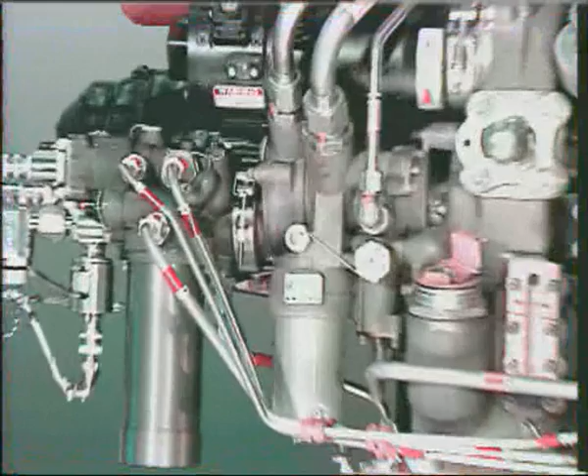The oil pump unit assembly is installed at the 9 o'clock position on the front of the accessory gearbox. The oil supply pump pressurizes the oil from the gearbox oil sump. The oil pressure is regulated by the oil pressure regulating valve. The high pressure oil system is protected by the oil pressure relief valve.

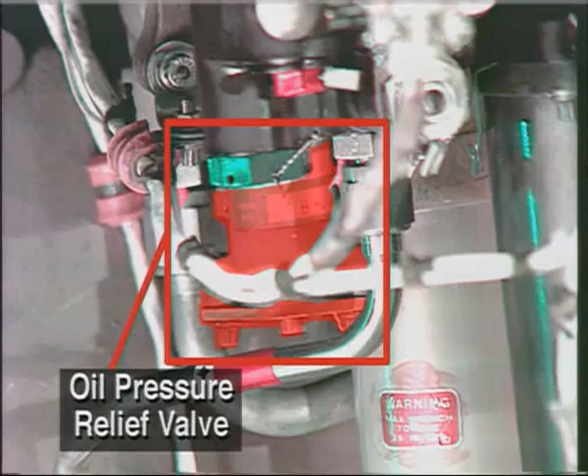The pressurized oil from the supply pump is routed to the thermal bypass valve, which is installed on the oil cooler. If the oil is cold, the thermal bypass valve is open, and the oil flows directly to the oil supply filter. When the oil is hot, the thermal bypass valve is closed, and the oil flows through the oil cooler to the oil supply filter.

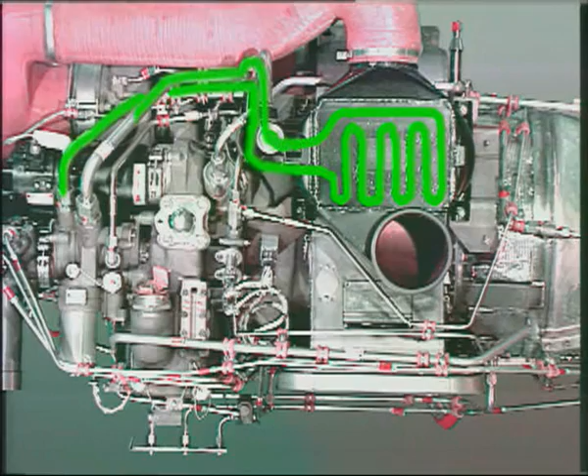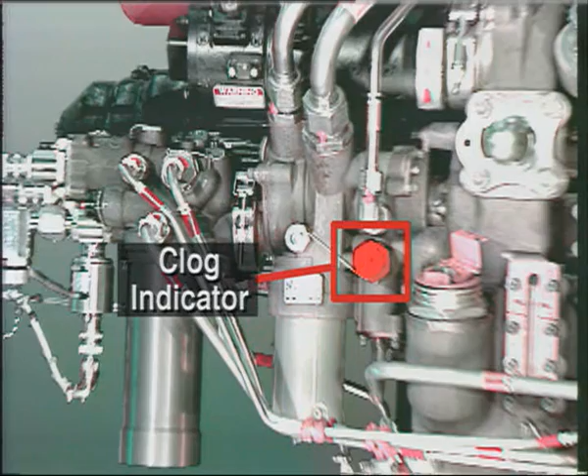The oil supply filter is mounted on the oil pump housing. The oil filter is equipped with a clog indicator for condition monitoring and a filter bypass valve to protect the system.

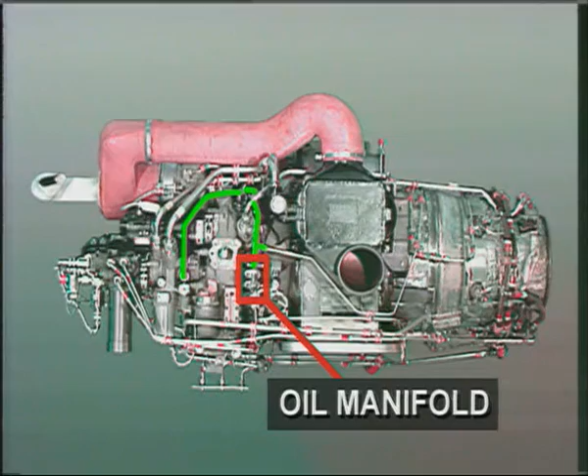The oil filter outlet line supplies an oil manifold installed on a bracket at the 9 o'clock position on the air inlet plenum. The oil manifold supplies the turbine support bearing. It is equipped with an oil pressure switch and an oil temperature sensor.

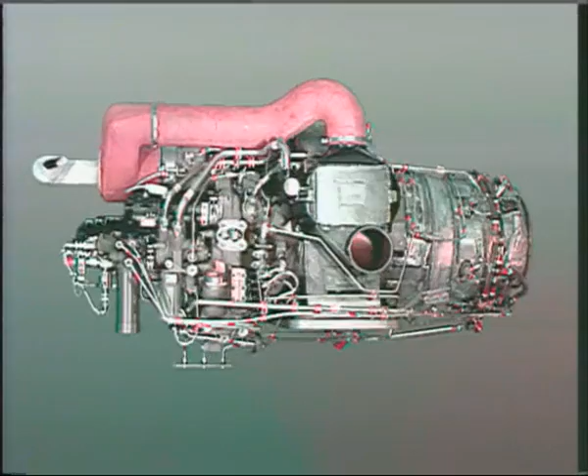The lubricating oil is returned to the gearbox reservoir to complete the cycle. The turbine support bearing oil is returned through a line from the 7 o'clock position on the turbine case. The oil from the starter clutch, the front support bearing, and the gearbox lubricating oil is returned internally by gravity.

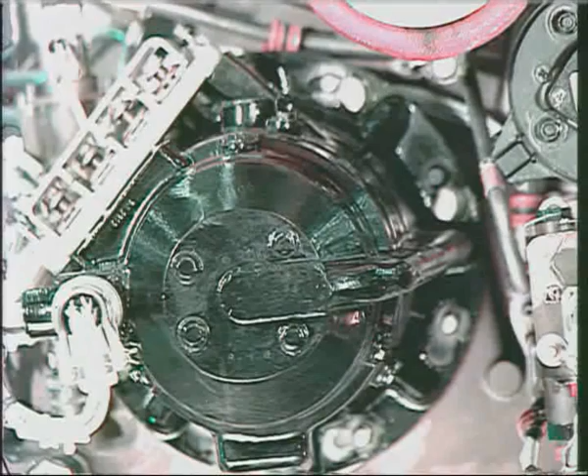The oil from the APU generator is returned through the generator oil filter by the generator oil scavenge pump. The oil scavenge pump is installed in the generator mounting flange cavity. The generator must be removed to gain access to the scavenge pump.

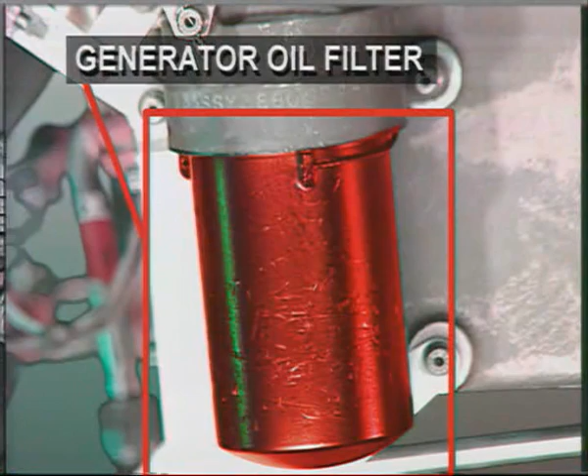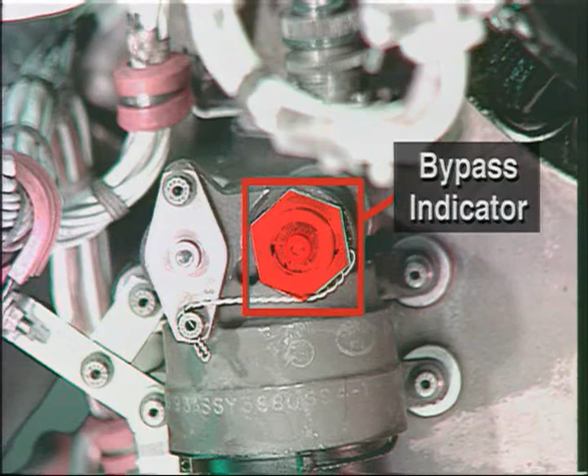The generator oil filter is located at the 3 o'clock position on the front of the accessory gearbox. The filter housing is equipped with a filter bypass indicator for condition monitoring and a differential pressure bypass valve to protect the oil system.

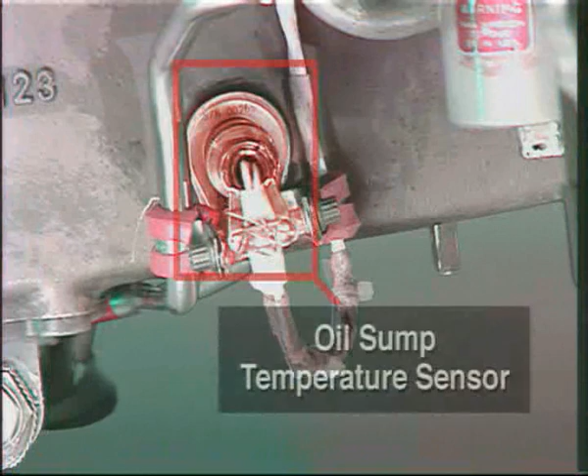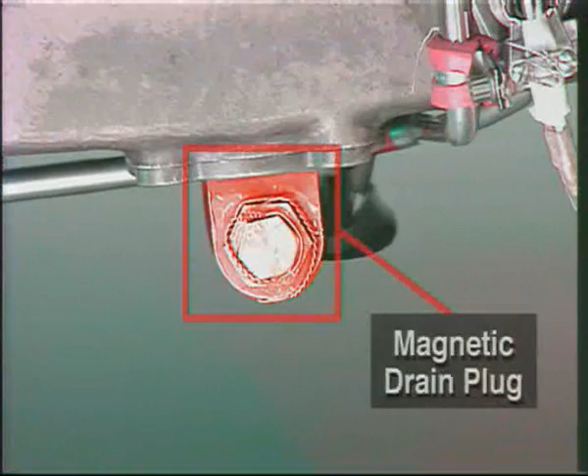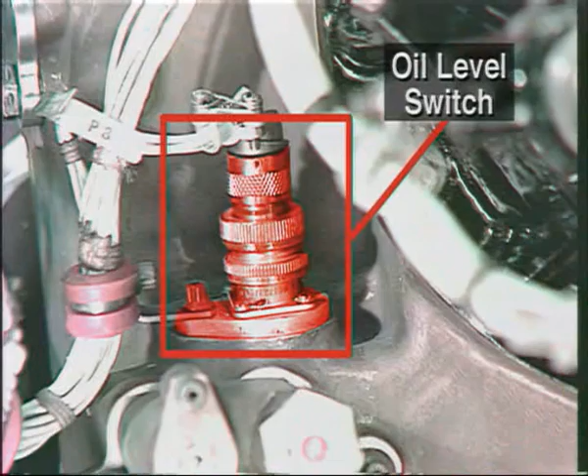The oil sump temperature sensor is installed at the 7 o'clock position on the front of the accessory gearbox. The magnetic drain plug is installed at the bottom center of the accessory gearbox. The oil level switch is located near the 3 o'clock position on the accessory gearbox. The de-oil solenoid valve is located near the 2 o'clock position on the right side of the accessory gearbox.

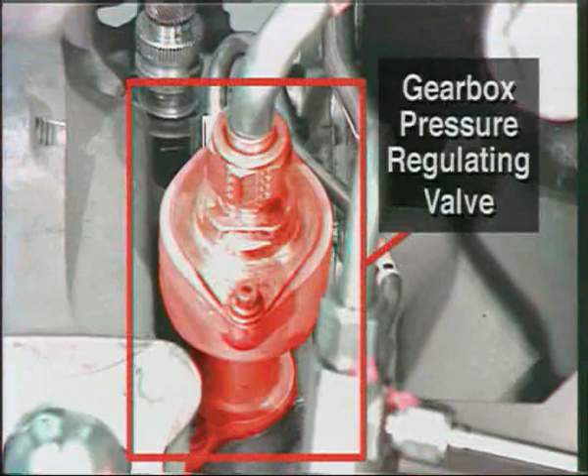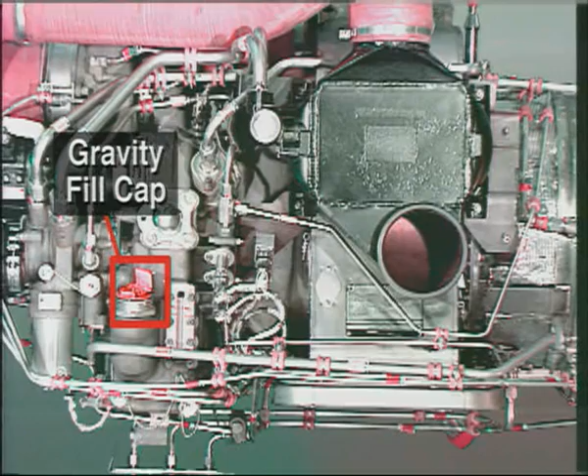The gearbox pressure regulating valve is installed at the 10 o'clock position on the left side of the accessory gearbox. Oil servicing is accomplished from the left side of the accessory gearbox. The reservoir may be filled through the gravity fill cap or through the pressure fill and overflow connections. A sight gauge verifies the oil quantity.